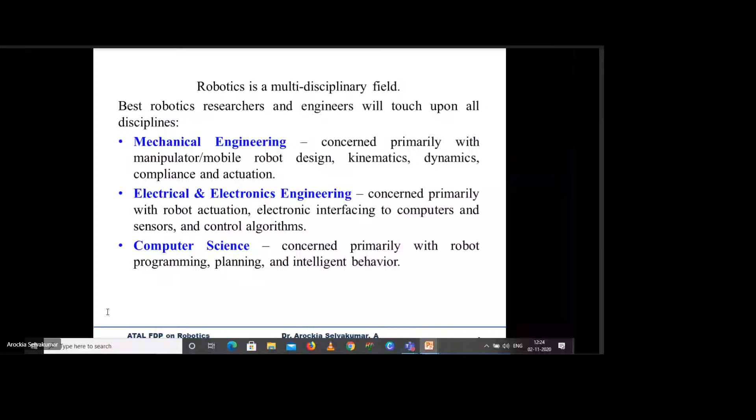If you are interested in robotics but unable to do all these activities, you can have collaborative work. As the earlier professor said, it's a collaborative field.

Next, most people get confused between automation and robotics, so I want to brief about that. Automation means machinery designed to carry out a specific task. But a robot is machinery designed to carry out a variety of tasks. That is the major difference between robotics and automation.

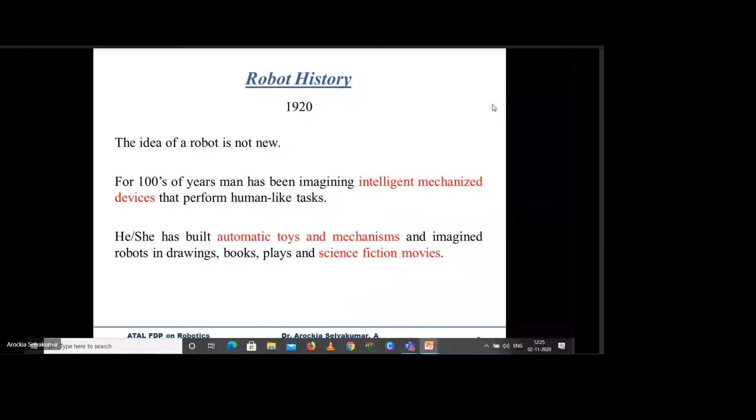Next is robot history. I think you know this well, but let me brief it. It started in 1920, so it's not new. They started making intelligent mechanized devices, and for the past 100 years we've been doing the same thing. In the earlier days, you can see so many automatic toys and mechanisms in movies, and some novels also portrayed this.

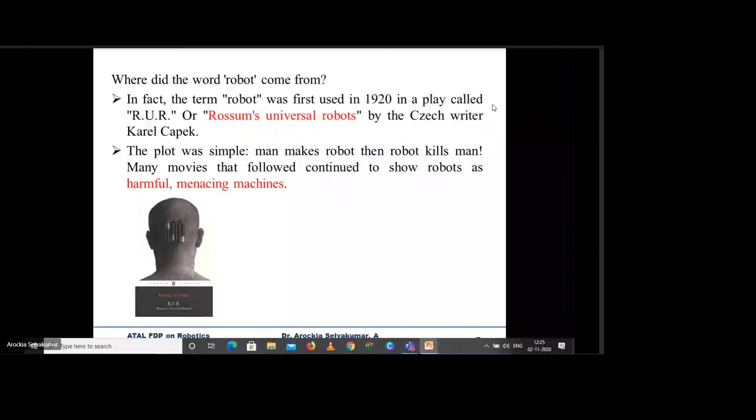The word 'robot' came from a Czech writer, Karel Čapek, in the play called Rossum's Universal Robots. The plot is very simple - if you can find this book, please read it, it's very nice. The man makes a robot, then the robot kills the man. That's really what happened in earlier movies - if you see Terminator 1, the robot kills humans. Later they realized the robot can be used for good purposes, so in Terminator 2 they made one robot a hero and another a villain. The term robot was coined by Karel Čapek in 1920.

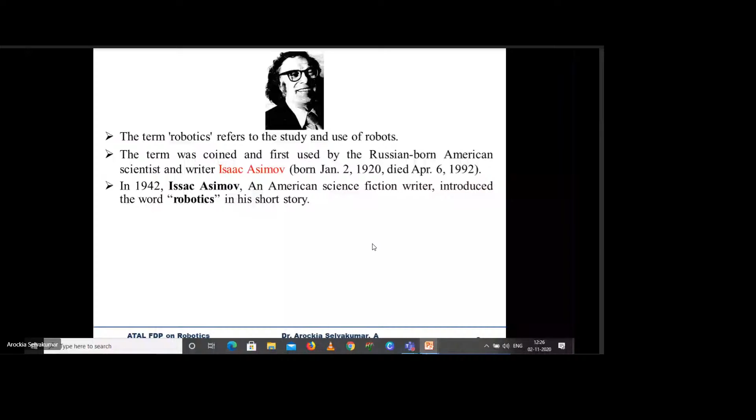Next is the person who made the three principles of robotics, or laws. Because of him, we make robots following these aspects: the robot should not injure a human being - that is the first law. Second, the robot must obey the orders of humans, but it should not conflict with the first law. The third is a robot must protect its own existence.

Till now, I think we've solved the first one - a robot may not injure a human being - we've developed robots following that law around 90%. Law 2, the robot must obey the orders given to it - we've also achieved that up to 90%. The last one, we still have not made robots in that category - that a robot must protect its own existence.

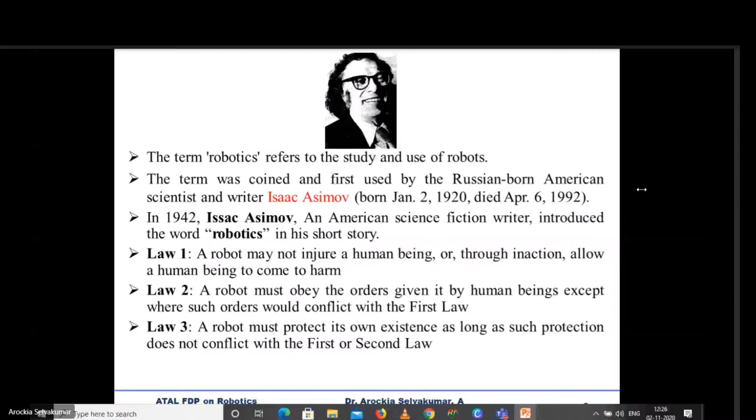So, general definition. Even though it is a very old one from 1920, the definition came in 1979 by the Robot Institute of America. That is, a robot is a reprogrammable, multifunctional manipulator designed to move materials, parts, or specialized devices through variable programmed motions for the performance of a variety of tasks.

If you ask me for a definition, I would say something different because I am basically from robotics, mechatronics, and mechanical design. But if a computer science faculty member is asked what is the definition of a robot, their definition will be different. As per RIA, Robot Institute of America, this is the definition of robot.

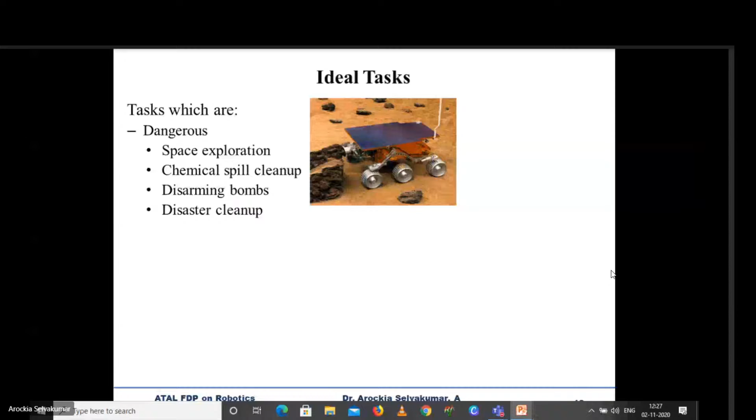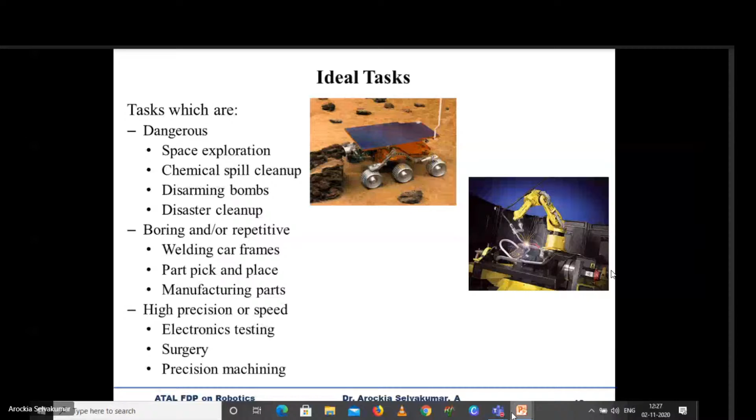So the tasks are at different levels: dangerous, boring, and high precision or speed. Generally they call it the 3D: dangerous, dull, and difficult. Here I am giving some other terms.

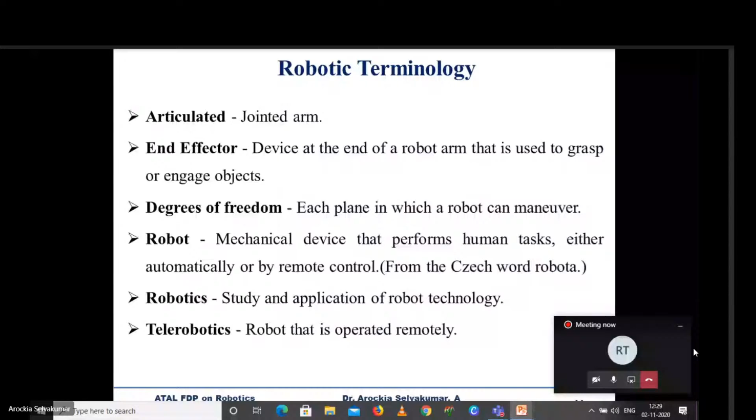Next one, robot anatomy. Any queries till now, professors? If you have any, you can ask me. Otherwise, I will continue. Any specific queries, professors?

Okay. Shall I proceed further? Sir, yes, sir, yes, sir. Yeah, thank you, professor.

So the next one, robot anatomy. It's very important because kinematics is very important. It's concerned with the physical construction of the body, arm, and wrist. Most industrial robots are mounted on a base, which is fastened with the floor. We have come across these in various industries.

The body of the robot is attached to the base, you know. Then the arm assembly is attached to the body. Then the end of the arm is the wrist. Okay, this is the geometrical schematic representation of robot anatomy.

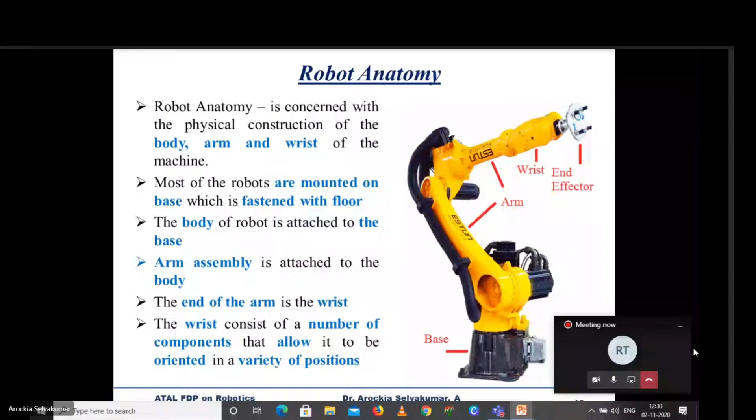One more thing is the wrist consists of a number of components that allow it to be oriented in a variety of positions. So the end of the arm and the wrist are very important, and what the wrist does is important.

As with our human hand, the relative movements between the various components are provided by a series of joints. The body, arm, and wrist are sometimes called the manipulator. The technical name for the robot hand is end effector, and the end effector is not considered as robot anatomy. Please take a note of it.

So whenever we are purchasing any kind of robot, if you come across it, the industry will say that the end effector will not come under robot anatomy. Even the workspace, they will plot and give according to the body and arm of the robot, not the wrist.

One more important thing is the arm and body joints of the manipulator are used to position the end effector. That is very important. And only the wrist is used for orienting the objects.

These are the things which are important from a geometrical point of view: joint, link, and the relative motions achieved by joints. The links are rigid members, similar to our hand.

Most robots have 6 degrees of freedom. The body and arm are used for positioning objects in the work volume, while the wrist assembly is for orientation of objects.

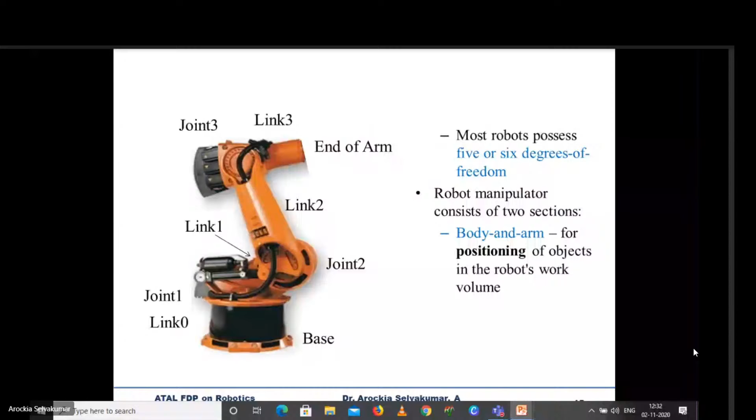Now we will come to kinematics. But before that, I want to explain manipulator joints, which come in different varieties. We will see them one by one so you understand better.

The first type is translation motion, having two joints: linear joint and orthogonal joint. In the first sketch, there is an input link and an output link, and the joint motion is linear. These are called linear joints, with type notation L.

Similarly, in an orthogonal joint, there is an input link and an output link, and the output link always has an offset of 90 degrees to the input link. These are called orthogonal joints. Sometimes the linear joint can also be put as a prismatic joint.

Next are rotary motions, which include rotational joint, twisting joint, and revolving joint. In a rotational joint, the axis of rotation is perpendicular to the axis of the two connecting links.

As an example, all professors have come across the mini drafter, which moves only on a plane. These kinds of joints are called rotational joints.

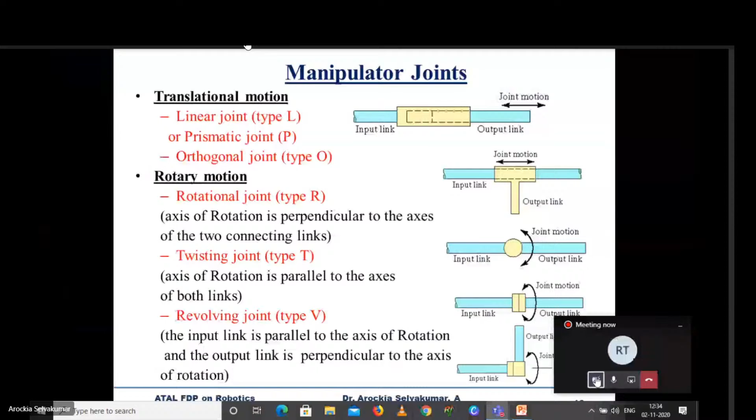Any doubt in this, professors, so that we will be very clear? Any doubt? No doubt, so I can proceed further, I think.

Now the important thing is the joint notation scheme. We use the joint symbols L, O, R, T, V - representing linear joint, orthogonal joint, rotational joint, twisting joint, and revolving joint.

Hello, yes professor, any doubt? Okay fine then. Is it clear? Professors, any doubt? I'm getting some voice. No sir, okay fine then. Ajal, yeah okay fine. Participants are muted or not? Okay fine professor, no problem.

The very important thing I want to discuss in this slide is the body and arm assembly and the wrist assembly - they are always separated by a colon. Whenever buying a robot or reading a research paper, you can understand notation like TLR colon TR, meaning the total robot has 5 degrees of freedom: TLR is 3 degrees of freedom for body and arm, and TR is 2 degrees of freedom for the wrist.

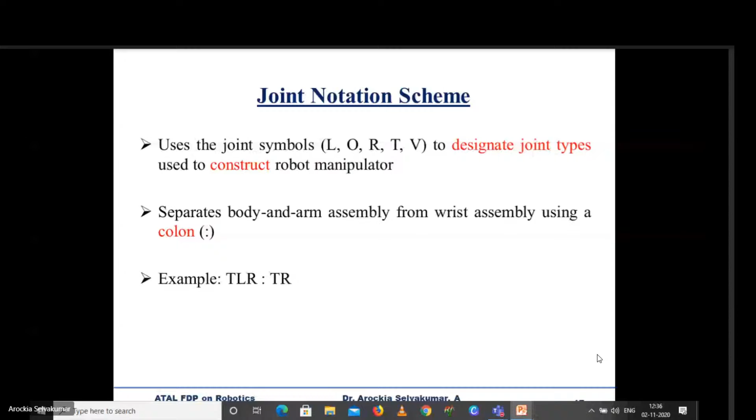Next are examples. You can see TRT colon R - this is how they represent the joint notation scheme, with no need to draw in 3-dimensional form. If you draw these symbols and mark them, we can easily understand how the robot is designated. T is twisting joint, R is rotational joint, T again twisting joint, and R is rotational joint - talking about the first sketch. So it has 3 degrees of freedom in the body and arm, and 1 degree of freedom in the wrist.

Similarly, you have B with totally 5 degrees of freedom: TVR related to body and arm, and TR related to wrist. Similarly, the last one has 3 degrees of freedom: RR rotational in body and arm, and twisting related to wrist.

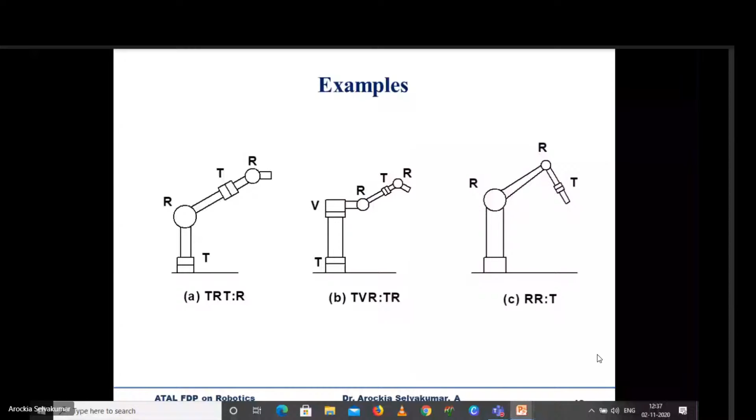Okay. Then robot classifications, it will take time, so I just want to go through fast. Based on arm geometry, you are having different types. Degrees of freedom, you are having different types. Power source, you are having different types. And then type of motion, we are having different types in robots. And then path control also, we are having different types. And the intelligence level also, we are having robots in 2 categories, low technology and high technology.

Okay, then arm geometry, you know that it is having rectangular coordinated. So this is a sample sketch of the rectangular coordinated. If you see the sketch, you will understand that it is having 3 linear movements. If you consider Z, if it is L, then your y-axis and x-axis will be orthogonal joints. So Z will be linear, Y will be orthogonal, and X will be orthogonal. So these kind of robots are called linear orthogonal robot, otherwise LOO joint robot.

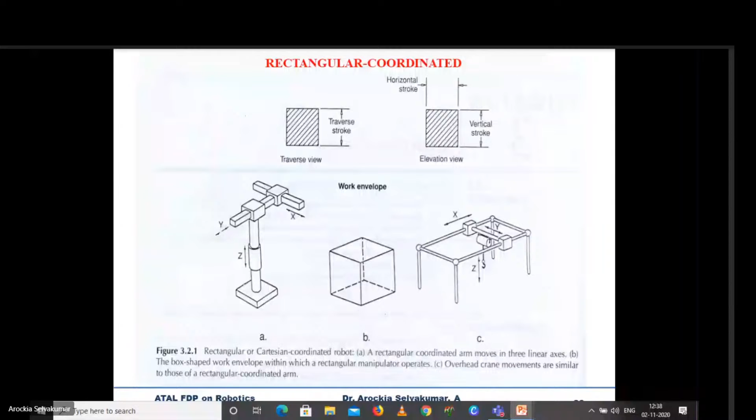Okay, so example, you can see the crane. So this is the way, and the front view and then top view, it's given clearly the work envelope and cuboid structure. This is the example. As I said, LOO, linear joint, orthogonal joint, and orthogonal joint. Why I am saying all these things is when we are doing kinematic analysis, the representation will be easy. That's the thing. And then next one is cylindrical coordinate.

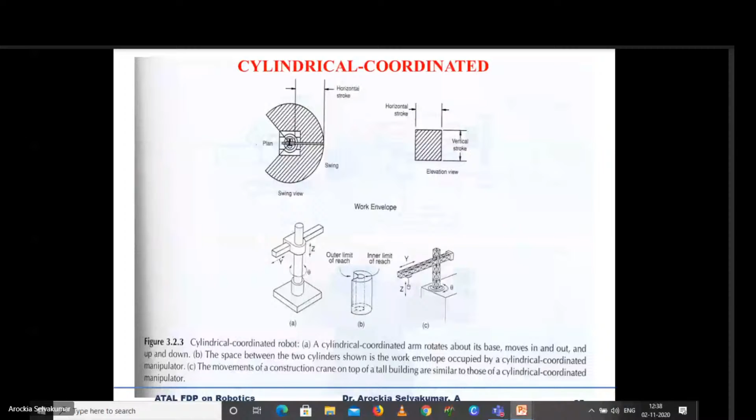So if you see the sketch, you have one rotation, and then you are having 2 joints. One is linear, another one is orthogonal. So one rotation is playing a role. This is the example of cylindrical coordinated robot. It is having the swing, and the elevation is there. So this kind of robots will give a cylindrical workspace. As I said, it is having one twisting, that is T, and then L is linear, and then O is orthogonal. This is the notation of this particular robot.

Okay, and then last one, spherical coordinated. The work envelope will give you a spherical volume. It is having two rotational joints, that is theta and beta, and then you are having one linear joint. This particular thing is known as TRL, that is twisting, rotational, and linear joint. These kind of things you can have in the polar coordinate robot, we will call it as. So these are general different classifications of robot that are used in the industry. Okay.

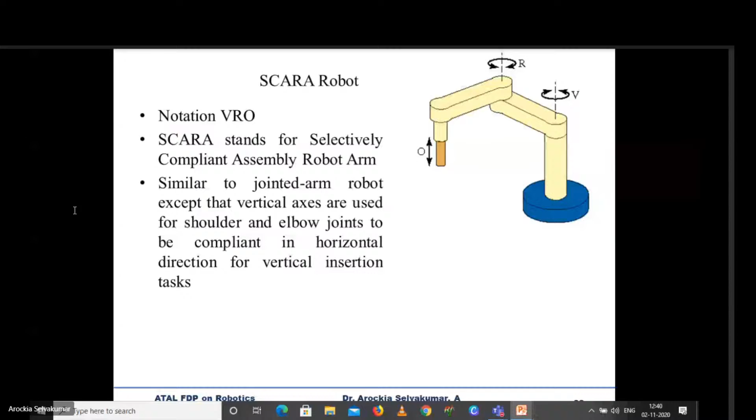The very important one I want to discuss is SCARA robot. This is the robot first used in the industry for peg-in-hole and pick and place applications. We call it selectively compliant assembly robot arm. The notation is VRO. V, you know that it is a revolving joint, R is rotational, and O is orthogonal joint. So if you see the sketch, you can understand now that this particular, 1 minute.

So this particular thing, you can say this is the axis, and then this is the axis of this. As I said, it will look like a fan. It will rotate like this. So that is a revolving joint, and rotational, you know that it's in a plane only. This axis and this axis, it will move like this. That is a rotational joint. And this one, with this link, it is having a 90-degree offset, so it is an orthogonal joint. So this is the way we can define the configuration of a robot. As I said, we use this one in industry, so you can proceed further.

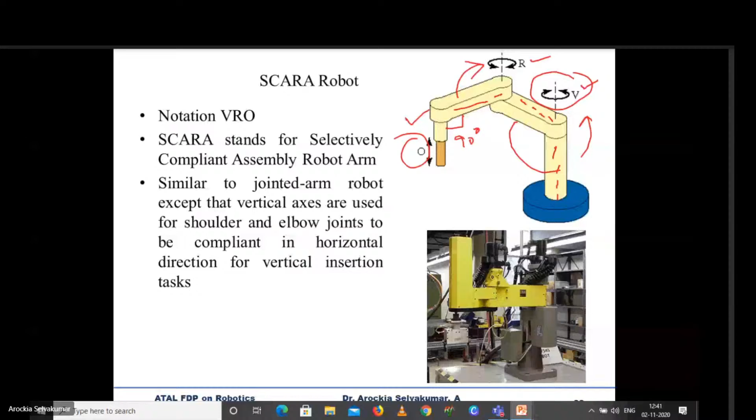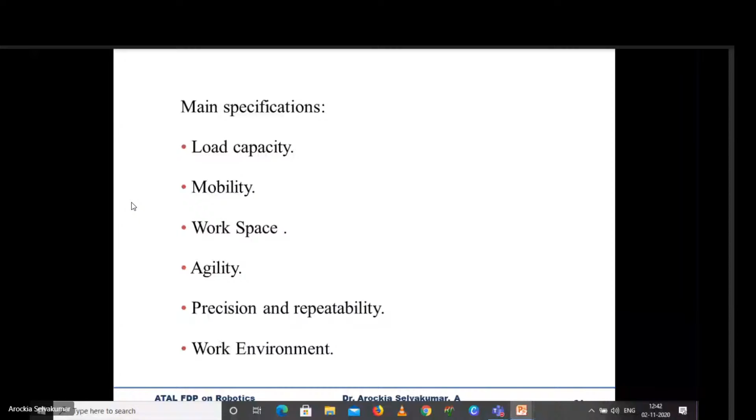The last one is where you want to use it, whether you want to use it for a teaching purpose, or in a food factory, or in an industry. According to that, we have to select the robot. It's a general criteria. So all these things I have already explained. These are general points about how you have to select the robot and what specifications are important.

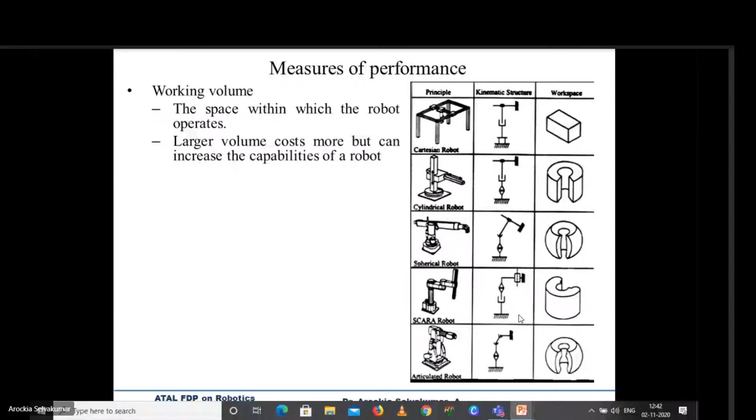Okay, fine then. And the measures of performance, you know that it is based on work volume. Different types of work volumes are there according to the robot structure. And then speed and acceleration is the second one. So how much speed it is acting at, and how much acceleration you can give to that particular robot when it is carrying a load. All those things are important parameters to measure the performance of a robot. And then the final one, resolution, obviously. It's the smallest step the robot can take. That's the thing in resolution.

As professors, all of you must have come across all these definitions if you are teaching robotics. If not, these are the things that are important to measure the performance of a robot: working volume, speed and acceleration, and then resolution. Continuing, that is accuracy and then repeatability, as we discussed. Accuracy is the difference between the actual position of the robot and the programmed position. And repeatability is whether the robot will always return to the same point under the same control conditions. So these two are very important.

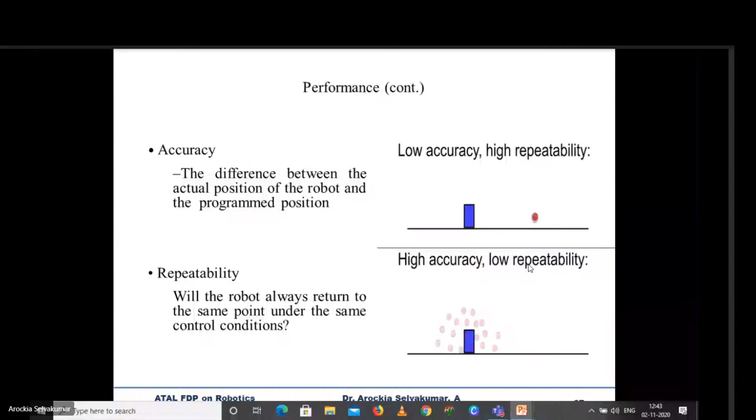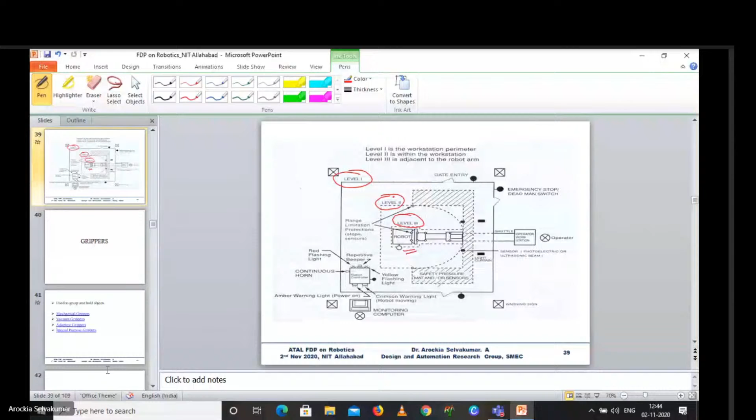So level 1 is the workstation perimeter. Once you are entering the perimeter, that is level 1. Level 2 is within the workstation. And level 3 is adjacent to the robot arm. According to that, different levels of safety are there. So these are general points in robotics design that I want to convey to you.

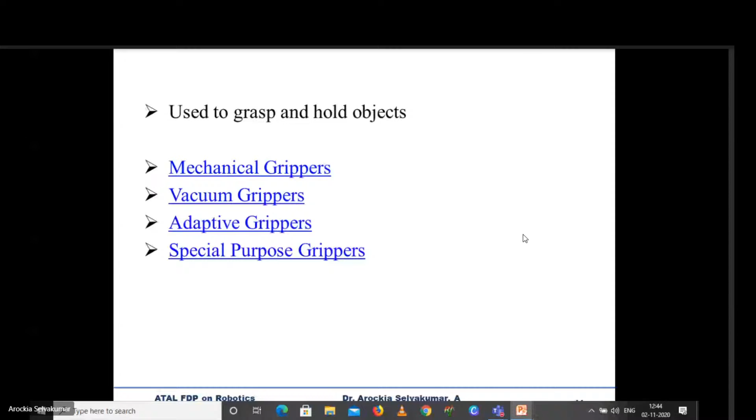Okay, fine. Grippers: we have different grippers, mechanical, vacuum, adaptive grippers and special purpose grippers. Anyway, my topic is the kinematics, so after this brief intro, I will move to the kinematics. And sensors and transducers. We are using many sensors in robotics: accelerometer, gyro, metal detector, gas sensor, from start to end we have n number of sensors used in robotics.

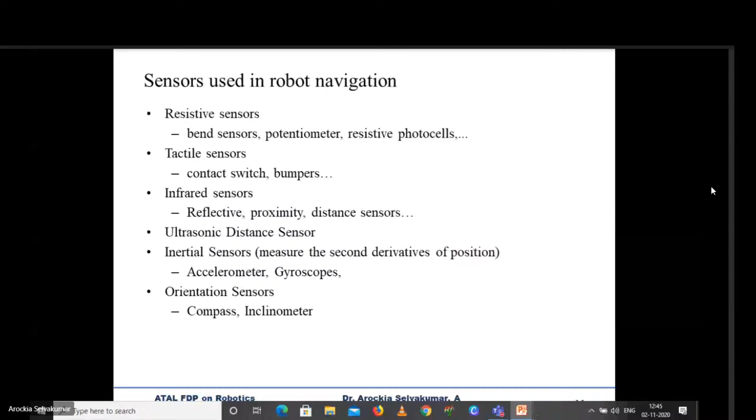So these are simple examples of where we can use a sensor. For example, resistive sensors: bend sensor, potentiometer, resistive photocell, tactile sensors, infrared sensors. For the application, you can ask where I can use this sensor. To measure the bend of a joint, for wall following, and a weight sensor where the load plays a vital role.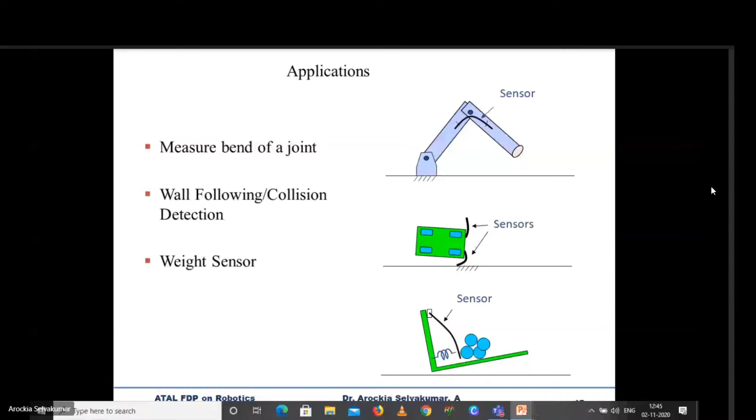With this, any queries so far, so that I can move on to the kinematic analysis?

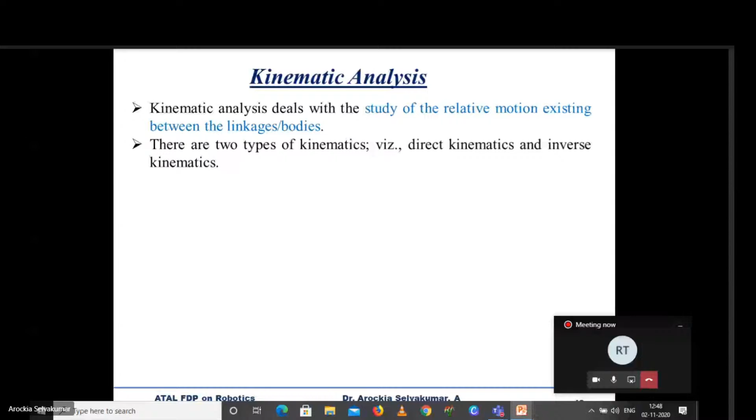And there are two types of kinematics: direct kinematics and inverse kinematics. For better understanding, I will explain with a sketch later. Mapping from joint space to Cartesian space is referred to as direct kinematics or forward kinematics. So now you want to know what is joint space and what is Cartesian space.

So if I'm having a robot, anyway, I can explain here also. If I'm having a small two-link robot, each link will have some angle with respect to the horizontal, for example theta 1 and theta 2. Link 1 will have some angle and link 2 will have some angle. At the same time, I know the endpoint also. If it is a planar manipulator, it will have x and y.

So mapping from joint space, that is theta 1 and theta 2, to Cartesian space, that is x and y. Theta 1 and theta 2 are the joint space. So if I am mapping from joint space to Cartesian space, it's referred to as direct kinematics or forward kinematics. That is the thing I want to convey to you.

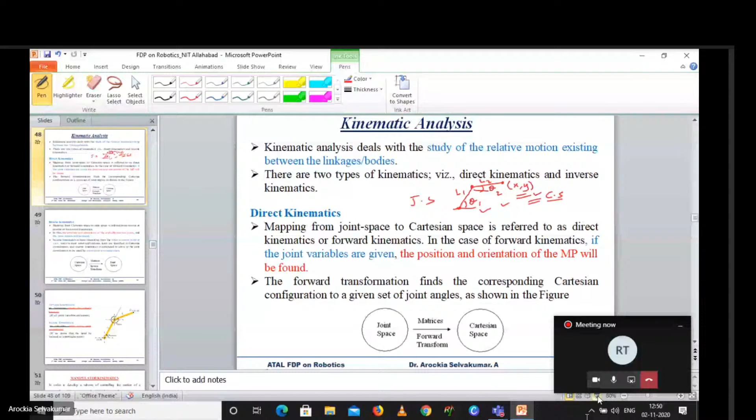If the joint variables are given, theta 1 and theta 2, we can find the end effector position, that is x comma y. Here I put MP, that is not related to the topic, but generally at the end point x and y we can calculate. So the forward transformation finds the corresponding Cartesian configuration to a given set of joint angles. Now I think you can understand much better.

The inverse kinematics is quite opposite. We are mapping from Cartesian space to joint space. It's referred to as inverse, reverse or backward kinematics. In this, the position and orientation of the end effector are given. That means you know x, y, and the link lengths L1 and L2, and the joint angles we have to find. So these are the two kinematics we follow in robotics.

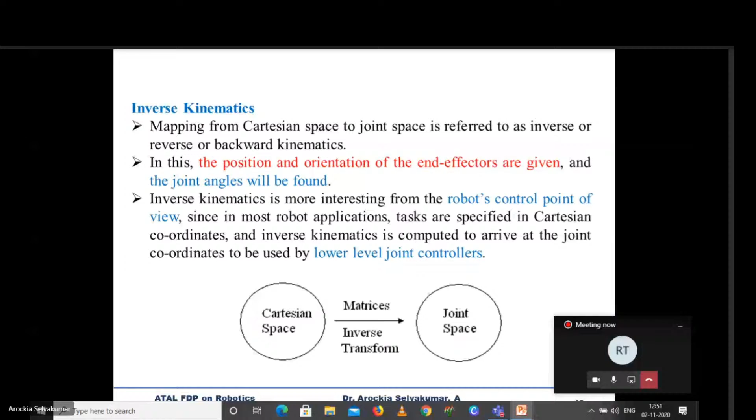The inverse kinematics is more interesting from the robot's control point of view, since in most applications tasks are specified in Cartesian coordinates, and inverse kinematics is computed to arrive at the joint coordinates to be used by lower level joint controllers. So those who are working in this particular area are quite interested in inverse kinematics.

Some example I can explain now. Hope you will listen, and if you have any queries, you can stop me in between. Forward kinematics tells where the robot hand is if all joint variables are known. That means if I know theta 1, the shoulder, and theta 2, the elbow, then you know the end position, that is x and y. And you have to know L1 and L2.

Inverse kinematics is to calculate each joint variable. Here I am very particular about how much theta 1 is and how much theta 2 is. But in forward kinematics I am very particular about what the x value and the y value are. As I said, this is at the origin, for example theta shoulder, and the entire thing you can take as theta elbow.

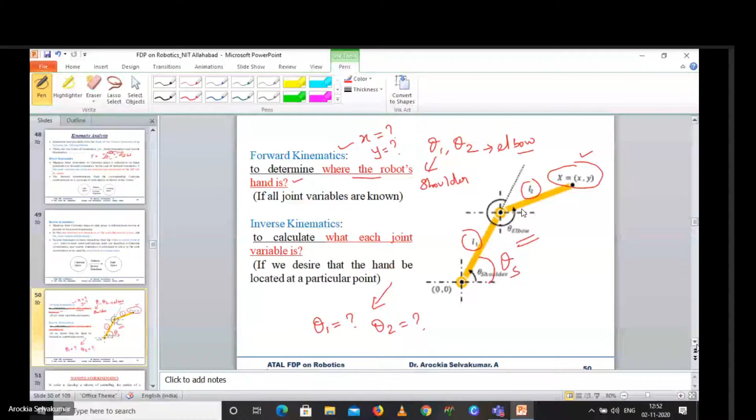So when we are calculating these mathematical relations, I'll go to the next one so that you will understand much better what I am talking about. So how to calculate these things? Why are we doing this? I have explained in this slide.

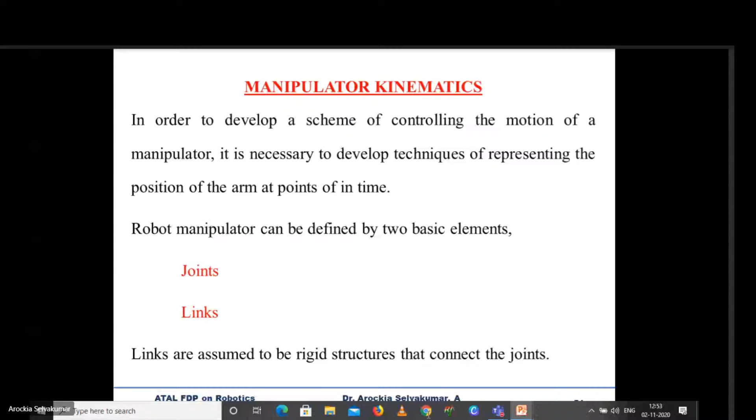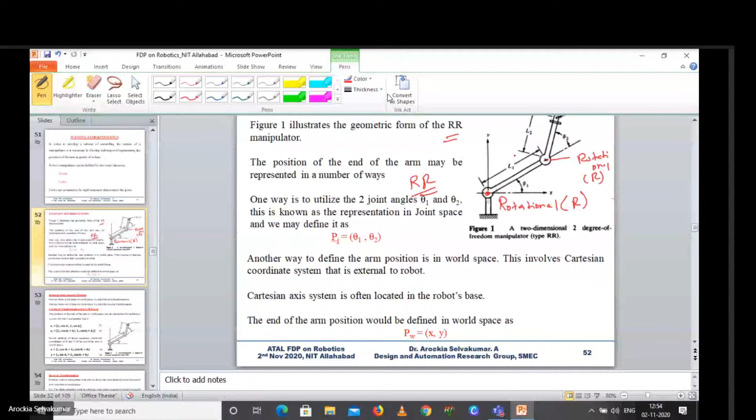The position of the end of the arm may be represented in a number of ways. So here in this sketch, based on theta 1 and theta 2, we can represent the position x and y. Okay, based on the input parameters theta 1 and theta 2, we can represent it in terms of px and py, that is x comma y. Two ways are there, as I said, forward kinematics and inverse kinematics. We will see one by one.

Any queries, professor, so that I can go slow? Any queries till now? No queries? Yes, sir. One query, please unmute yourself. Yes, please unmute. Sir, can you hear me? Yes, I'm getting you. Please, yeah.

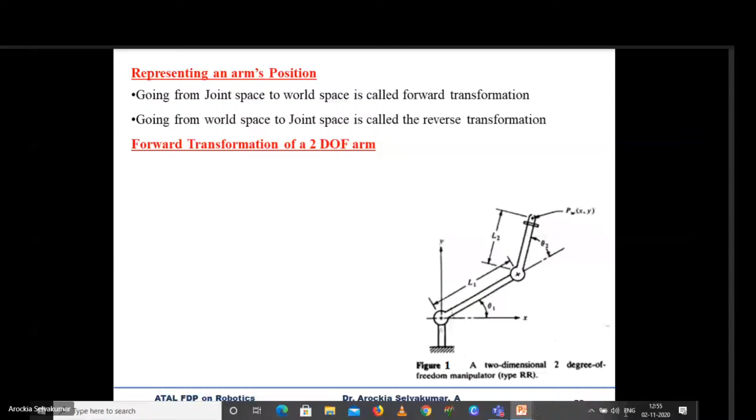Sir, actually, in the forward kinematics, you told that you have to take the angle with the horizontal. Is it a compulsion, sir? No, it's not like that. Very good question. Actually, if you take it that way, then it will give a relative angle. For example, this is theta 2 and this is theta 1.

So when I am calculating for the entire thing, I need a reference point. So from this, if I am calculating, automatically it will come to theta 1 plus theta 2. Are you getting me? Yes, sir. So that is why I said it's better to go with the axes x and y. Okay, sir. Thank you. Anyway, we will solve it one by one so that you will understand much better. Thank you for your question.

So first, I am going with forward transformation. As I said, going from joint space to world space is forward, and going from world space to joint space is reverse transformation. The position of the end of the arm is given. So I will draw here so that those who are interested in kinematics will understand. I am taking the first link alone, and here this is X and this is Y.

So if I want to calculate R1, I want to know the horizontal component. The horizontal is L1 cos theta, taking this as theta, and the vertical is L1 sin theta. I'm talking about this point, point 1. So the first point location, R1, will be L1 cos theta 1 comma L1 sin theta 1. This is the coordinate. Any doubt in R1?

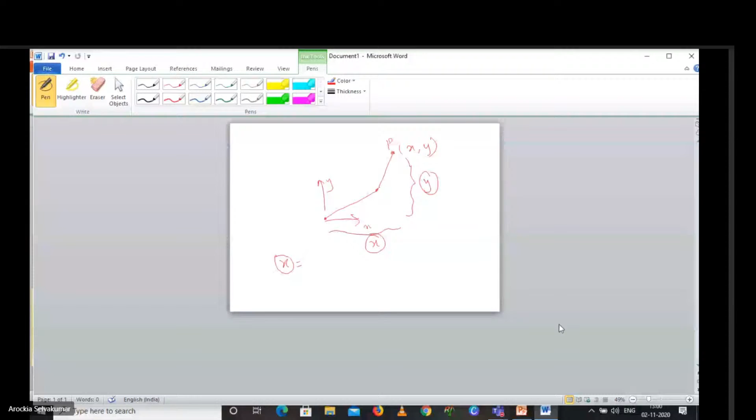So when I am writing, obviously it will come L1 sin theta 1 plus L2, sorry. So when I'm going horizontally, obviously it will come like L1 cos theta 1 plus L2 cos(theta 1 plus theta 2). I will get the coordinate of X. When I'm going with Y, obviously I'll get L1 sin theta 1 plus L2 sin(theta 1 plus theta 2).

So we know that this horizontal distance is L1 cos theta 1, this entire thing. And then this horizontal distance is L2 cos(theta 1 plus theta 2). And this vertical distance is L1 sin theta 1, and this entire thing from here to here, the vertical distance is L1 sin theta 1 plus L2 sin(theta 1 plus theta 2). And from here to here the vertical distance is L2 sin(theta 1 plus theta 2).

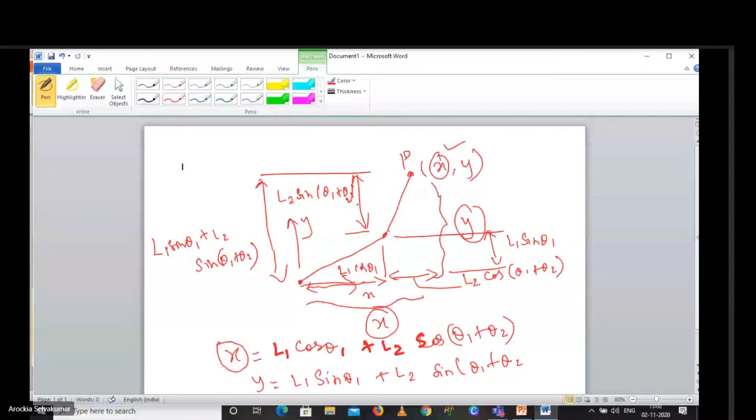Okay, so any doubt, guys? Any doubt, professor? If there is, I can explain. Otherwise, I will move on to the next one. We are just at 10% of my presentation. Can I proceed further? Yes. Yeah. Okay. Yes, fine, sir. Yes, sir. Okay. Thank you.

So the next one, once we have done that: X is L1 cos theta 1 plus L2 cos(theta 1 plus theta 2), and Y, all these things we will get. This is called representing an arm's position in forward transformation of a 2 degree of freedom RR manipulator. If it has some other joints, we have to calculate the position according to that. So the next one is reverse transformation. This is quite interesting actually.

In reverse transformation, instead of X and Y, we have to calculate theta 1 and theta 2. In this particular configuration, there are only two possible configurations for the robot arm to reach the position. For example, this RR manipulator wants to reach this particular point. This is the point and this is the RR manipulator sketch. This is R and this is R.

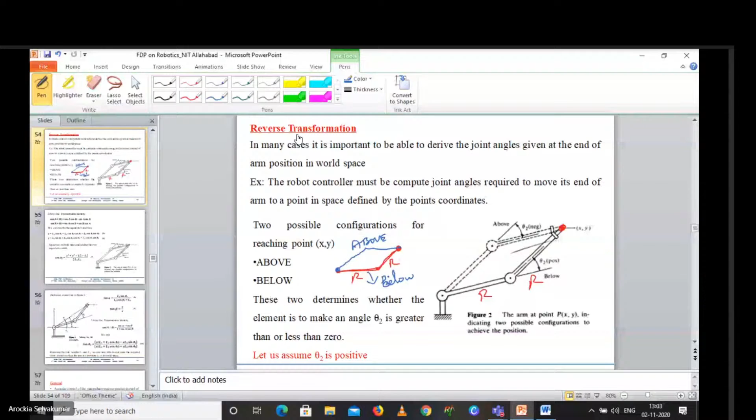So either the manipulator can move like this and then reach this particular point, or the manipulator can move like this and then reach this particular point. There are only two possibilities. One is above, another one is below. Only these two possibilities are there for this RR manipulator to reach the point X comma Y. So that is the definition I have given here.

Okay. So it's up to you to assume theta 2 as positive, or you can assume theta 2 as negative. So when you are calculating reverse transformation, all these conditions you have to check. Okay. That's the thing.

And after this, okay, so now in this case, we are going to use some of the trigonometric identities to solve the problem easily. So you know the 3rd and 4th equations, I want to recollect that. Then only you will understand.

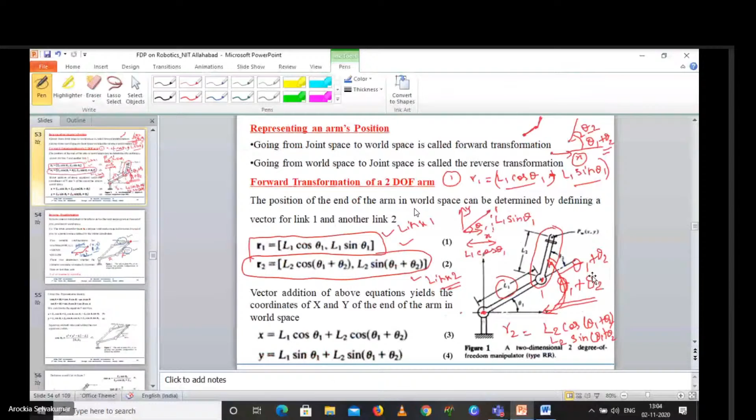I think we have written it before, again I want to recollect that. These things you have to take to calculate the reverse transformation, that is inverse kinematics. This particular equation will be used to calculate the reverse transformation, equations 3 and 4.

That is, X is equal to L1 cos theta 1, L2 cos theta 1 plus theta 2, and Y is L1 sine theta 1 plus L2 sine theta 1 plus theta 2. Because of these things, we have a formula called cos(A+B) and sine(A+B), so we have to use those relations to solve these equations. That only I want to convey.

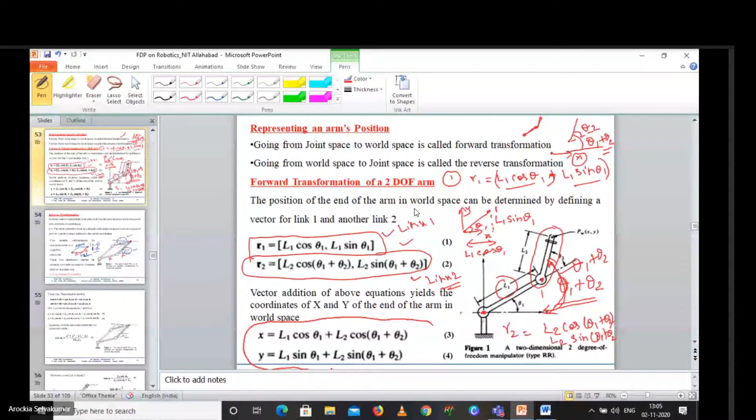Once you take the third and fourth equations, what we are doing is simply rewriting, that is, we are expanding the term. X is equal to L1 cos theta 1, L2 cos theta 1 cos theta 2, and L2 sine theta 1 sine theta 2. If you use this formula, you will get equation 3 in the form of equation 5, and using the same approach, you will get equation 4 in the form of equation 6.

Once you square it, x square and y square, and add these two, you will get cos theta 2 equal to x square plus y square minus L1 square minus L2 square, divided by 2 L1 L2. It's very simple. Sine square theta plus cos square theta becomes 1, and then you can cancel all the other terms, so you get cos theta 2.

So from this you can calculate what is cos theta 2. So this is the first calculation in the inverse kinematics, or reverse kinematics, or backward kinematics. So many terms are there for reverse kinematics.

After this, once we calculated theta 2, we have to calculate theta 1 also. So here what we are doing is, again we are assuming the same triangle, so you will understand much better. So what I am doing is taking the points, this is point 1, this is point 2, and this is point 3, for example, and making a triangle relationship.

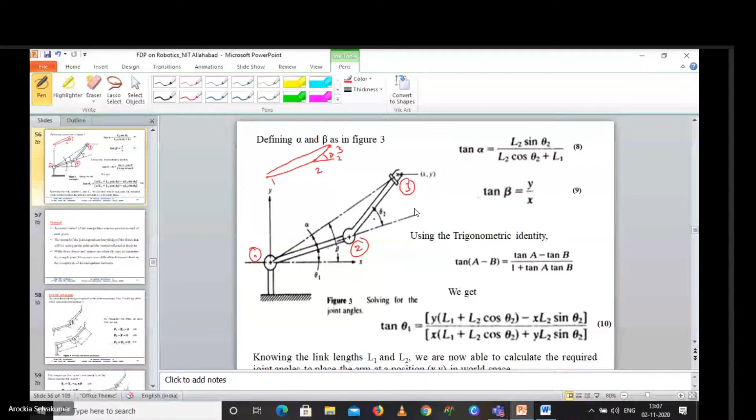This is 1 and this is 2, and I know this angle is theta 2, and this one I am talking about, and I knew what this angle with horizontal is, that is theta 1 here. Then I give the entire angle a denotation as beta, and this one I give as alpha. So all the terms I have given clearly.

So hope you understand this. So for this particular diagram, again we are using the trigonometric relation. Here tan alpha, for example, tan alpha is equal to L2 sine theta 2. So you know where it will come.

I'll draw like this, then you will understand much better. So this is your alpha. This vertical distance is L2 sine theta 2. I have drawn a line here. Now you will understand, I think. This one, this is L2 sine theta 2. I'm not adding theta 1, please try to understand.

And this one, I know very well that it is nothing but L1 plus L2 cos theta 2. So now I am not taking the component with respect to horizontal, I am taking along the line of action only, like this. This is link one, the same line I am taking, and this is the end point, and I am joining this with this, and giving this one as alpha.

So this one I know is L1, and this length I knew is L2 cos theta 2, and this one is L2 sine theta 2. Based on that, what we found out is alpha, and then how to calculate theta 1.

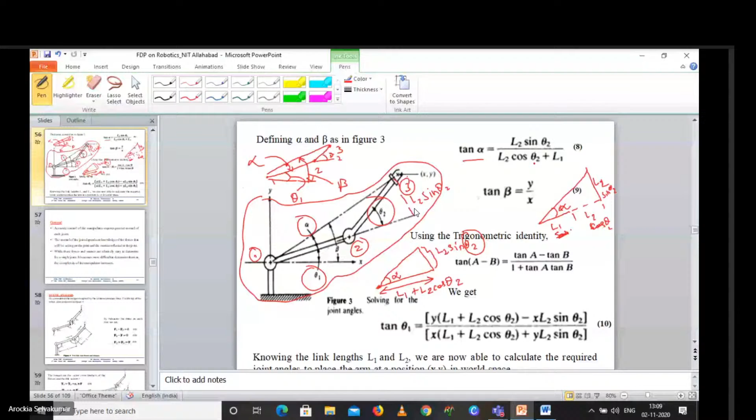So obviously I know this is beta, this is alpha. So if I substitute beta minus alpha, I will get the value of theta 1. In this condition, you see the entire thing is beta, and this one is alpha, this is alpha, this is beta.

So obviously I will get theta 1. With this tan beta I have calculated, you know that. Here I can draw, I think so - sorry if it is quite confusing, extremely sorry, but if you are listening then it will be better. So this is beta, the entire thing is y, this one is x. So when calculating tan beta, it will be y by x. Then I am using tan of a minus b, as I told you, since I want theta 1. So I got theta 1 with this relationship.

If you are having any other queries, please ask. Otherwise, I think it is 1:10, so shall we wind up or shall we continue, sir? You can continue up to 1:30. It's... no, I have some voice, the question I am not getting clearly, that's only. Can I continue? Yes sir, yeah you can continue to 1:30, sir. Okay, okay sir, till 1:30 I'm having.

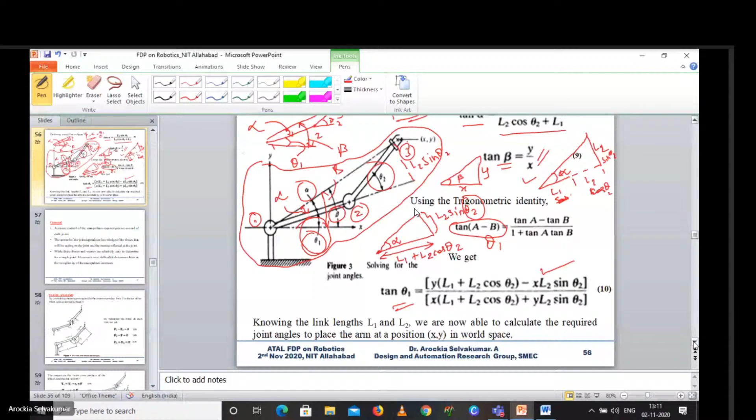Sir, in R2 calculation you have written L2 cos theta 1 plus theta 2, and that is L2 with sin theta. Yeah exactly, that is with respect to link 1, sir. But the angle is taken from the reference point, not taken from link 1. Yeah exactly, you're right, very good question actually. Can I explain here, sir, so that you will understand?

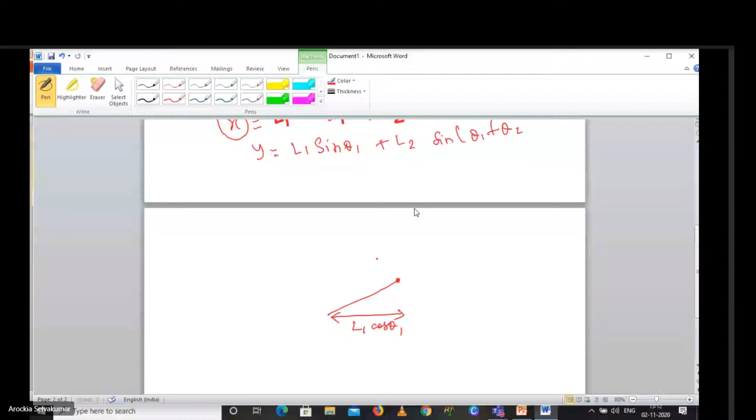So this one will be better in kinematics. Instead of working on the PPT, the thing is, I want to give R1 and R2 only, sir, not with respect to the origin. Taking link one, this one I think so, sir, is L1 cos theta 1, am I right? Yes. And this one I am giving as L1 sin theta 1, am I right sir? Yes sir. So here I am giving that R - this is R, I am giving as L1 cos theta 1, comma, L1 sin theta 1. Any doubts, sir, in this?

No sir. Okay sir, so when I'm coming to the second one only you are having a doubt, am I right? Yes sir. Yeah exactly, that one is also the same thing only, sir. Now I'm taking only the value of this one, as this one is related to theta 2, am I right sir? Yes sir. Now I want to give this R1 - I know this will give the slope value, L2 sin theta 2, am I right sir? This one will give L2 cos theta 2, am I right? Yes sir. But I want the coordinate to be like this in L2 also, so how will I give this one, sir?

So in this condition, when it is coming to the horizontal, when I am plotting, automatically I have to add theta 1 plus theta 2. Yeah, that's only. Here what it came is L2 cos of theta 1 plus theta 2, and here it came L2 sin of theta 1 plus theta 2. Is it clear, sir, now? Okay sir, okay fine sir.

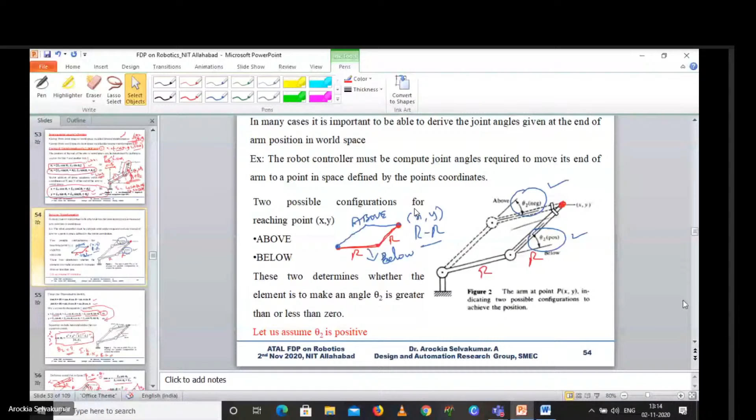Thank you. Any other doubts? If you have, please ask so that I can move to the next one. Excuse me sir, if you are not having any other doubts, excuse me sir. Okay fine, so if you come across other things later, I can move to the next one - very important for control, because we are talking about control, so how kinematics and dynamics are playing a vital role in this. Anyway, in the afternoon session our professor will explain about dynamics, so I am going to concentrate only on kinematics. After this, if you want to make an accurate control of the manipulator, it requires a precise control.

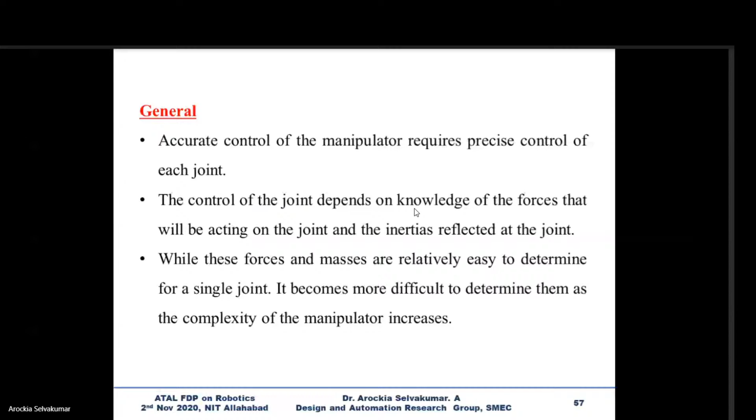So when you want precise control, you have to consider the inertias and how the forces are acting on that particular manipulator. So I want to give a brief overview, maybe the professor will explain in detail.

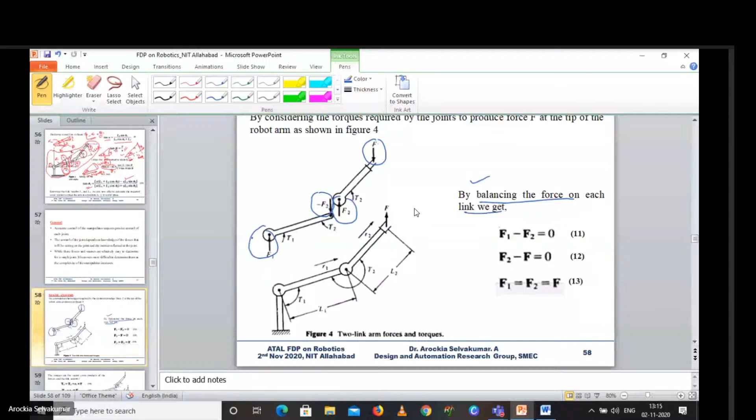I'm not going to deal with this in detail, because after this session our professor is going to take up dynamics. Just want to give a brief about this. Similarly, when you draw the free body diagram, you can represent it like this, with R2, R1, L1 and L2. Finally, you should always remember that F1 is equal to F2 and F2 is equal to F. So this is for two links, how to calculate the force.

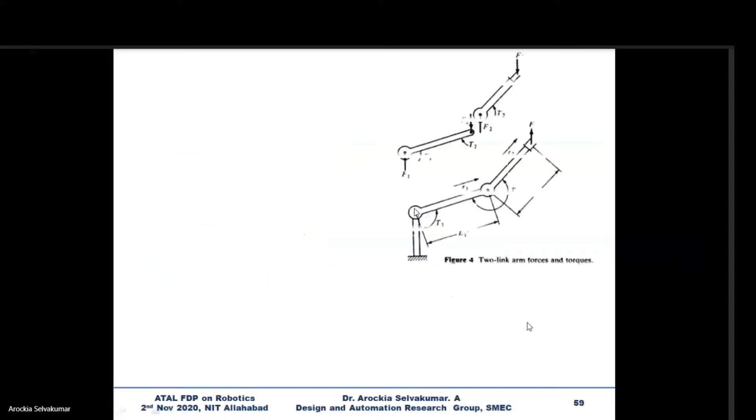Next, I'll move on to torque. So T1 is equal to T2 plus R1 into F, and T2 is equal to R2 into F. These are distance vectors, so distance vector multiplied with force gives you the torque value. Because it's coming in rotation we call it torque; if it's bending, we call it bending moment. That's all, so these are the parameters.

Just to brief about what is happening in the torque calculation. So now you will understand why kinematics is important in designing a manipulator. If you position the manipulator clearly with the parameters, you can easily multiply it with the forces and calculate the torques easily.

These torques are what we give as input to electrical and electronics engineers to find the exact motors we want. Based on that we specify it. Of course the factor of safety comes after this, and you have to select a suitable motor and check it first. Don't just buy a motor rated 10 kgf and run it; first check whether it's actually giving 10 kgf centimeter or not. Those things are important. So this is how kinematics is related to any manipulator or robotics design.

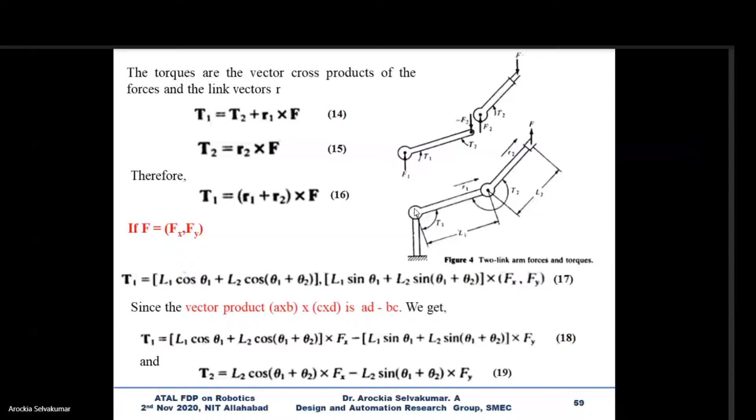That's all, so after this, I think you come... yeah, any doubt? Yes please. Mr. Arun is having some doubts. Mr. Arun, please unmute yourself. Mr. Arun? Yeah, please ask your query, sir. So please continue, sir. Oh okay, fine.

So, based on those equations, you can get the force relations also, Fx and Fy. Now you will understand how the position kinematics helps to calculate the torque and components of forces. You can calculate these things, and give these parameters as input to the robot, and then control its motion. That's the thing, that's only what I wanted to say here.

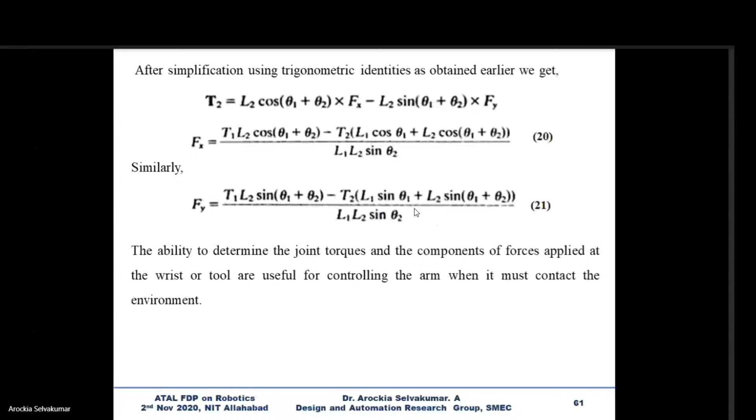In the beginning, this was for 2 arms; we are having up to 6 arms. So now I have a small question for you: to measure the forces and torques in robotics applications, what do we use? Any idea? If anyone knows, you can say, otherwise we will proceed further.

Okay, fine. Okay, fine then, good. It's sensors actually. Okay, that's the thing. Next one is gravity. Anyway, our professors will discuss it, so I want to skip this for the afternoon one. And now this one, because this is general in design, I want to say to you.

The arm can be constructed with as low mass as possible. That is, more of the motor torque will be used to provide forces at the end of the arm. So in a serial manipulator, we face a problem in pick and place applications: after n number of cycles, the position and accuracy have some problem because of the multiple repetitions. That is nothing but fatigue affecting it.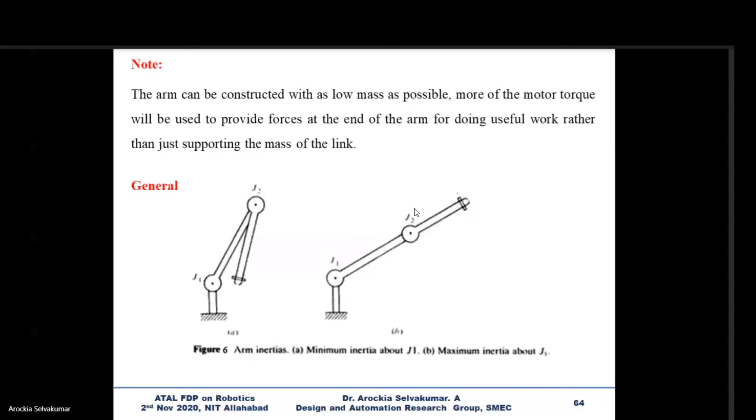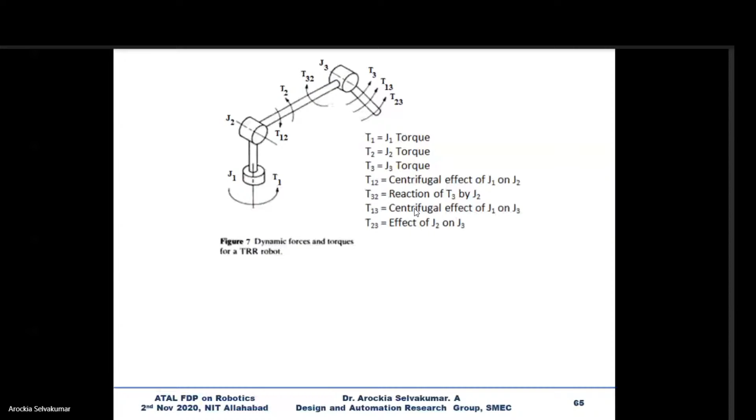So these are the different torques, the dynamic forces and torques of the robot. You have so many torques, and then the centrifugal effect. All those things play a major role. For all these things, the basics are kinematics. That's what I want to say to you. This one is not needed, we will move to the next one. Any queries? I will spend 5 minutes with you. After that, we can start the new one, where we are going to see DH parameters and other things.

Any specific queries, professors? Sir, one question: can you tell more about robot repeatability? What is robot repeatability, and how is it maintained? Okay, fine, sir. Just 2 minutes I will spend, after that I can go. So repeatability, same definition only, sir.

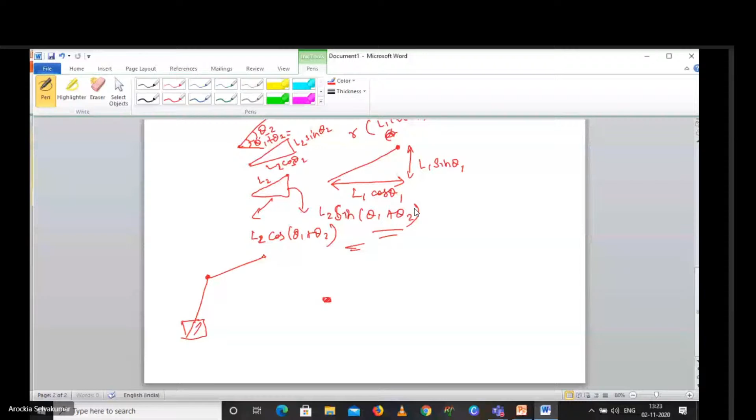Suppose you have, for example, a robot fixed with 3 links. Consider it like this: 3 links, and then you have an end effector here. It has to come and take this particular object and place it. It has to come and place the object here, but your robot keeps on coming and placing your object here. Are you getting it, sir?

Yes, sir, I am listening. Okay, here only it is coming and placing always. So how many times the robot comes and places the object at the same point, that is called repeatability, sir. It is not related to your exact location. Are we clear, sir? Yes, sir. So you can achieve this with sensors, proper kinematics, and all this control. How many times it comes to the same position.

Tell me, sir, there is a doubt. Yes, professor. What is the difference between accuracy, precision, and repeatability? Yeah, that's what I said. Repeatability is related to how many times. Okay, are you clear with repeatability, professor? Yes, sir. Thank you, sir.

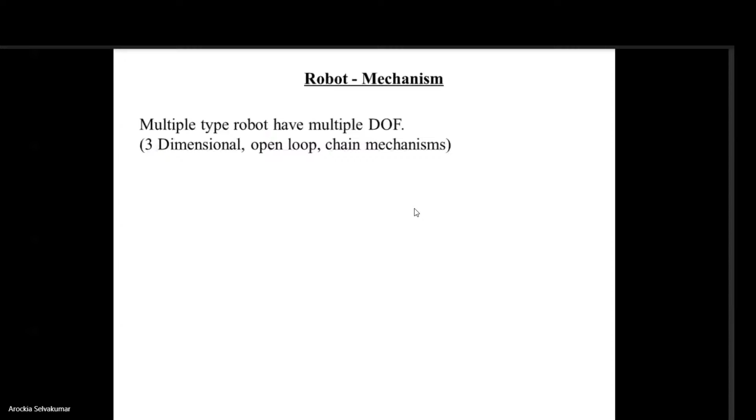Can you tell me which torque you are talking about, the motor torque or the torque applied by the force of the body? Very good. First we are talking about the design of the system, so we did not consider any major forces. For example, you can consider the self weight. First you design for the self weight of these links, then you get the value of torque and force. After that, you apply the actual force, how much you want to lift, for example a pick and place.

Maybe here you will have an end effector, in this particular area, which is going to lift a load of 2 kg. Now you apply a force for different configurations. Maybe the force will be vertical, or horizontal. So which one is the worst condition, Professor? Any idea? The fully extended condition will be the worst condition. Yes. So in the fully extended condition, you apply the force of 2 kg, and then calculate the force and torque.

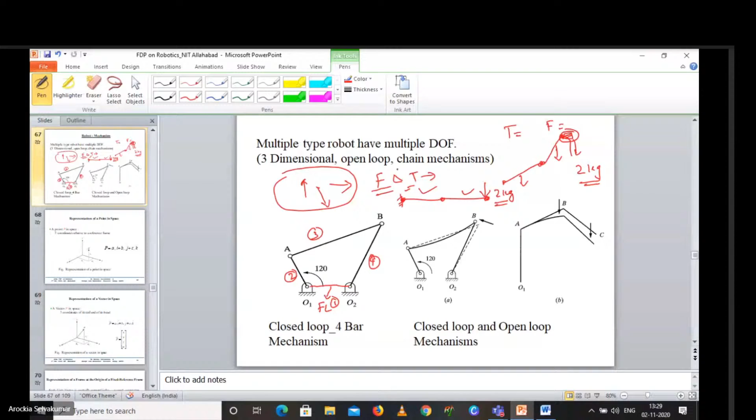After that, please don't go with the design directly. Please multiply it with a factor of safety of minimum 4. Based on my research experience I am saying this; if other professors suggest otherwise, please follow them. On my design I went for a factor of safety of 4, and I bought a motor of 10 kg-centimeter, but my robot did not move even after that. Why? There are problems like friction, losses in the joints, and design constraints. So apart from motor selection, we have to consider all these aspects.

So after applying the factor of safety, 4 times the actual torque or force, your mechanism will definitely work if it has proper design for the friction at the joints and the design constraints. All these things you have to check once again. That's what I have suggested. Then we have to put it into the expression. Exactly, you should multiply. That is very important.

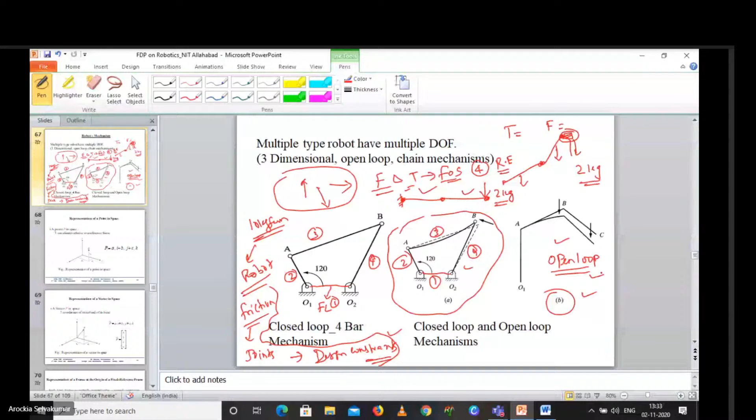Okay, that's the thing. So if you see our industrial robots or wherever you see a serial manipulator, the base will be very bulky. After that, the shoulder, elbow, and up to the wrist, it will be similar to our hand. Our shoulder is big, the elbow is smaller, and the wrist is comparatively smaller. So the arrangement is the same in a serial mechanism.

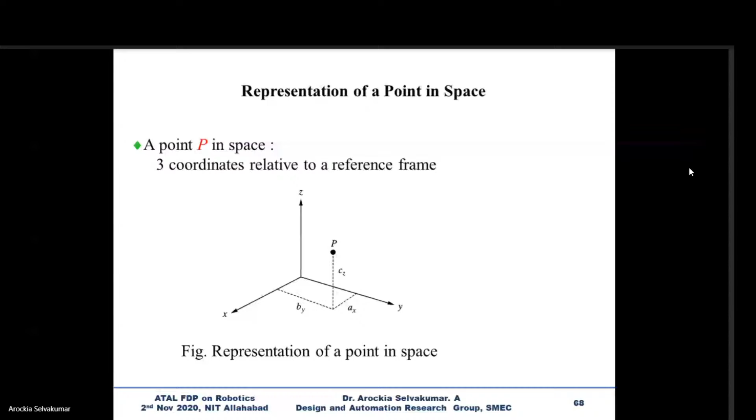So the point P can be represented as AX, BY, and CZ, that is, AX I vector, BY J vector, and CZ K vector. Just I want to recollect. After that we can move on. So next, if it is in space as I mentioned, you can give with respect to the x-axis, y-axis, and z-axis how much distance the point P is placed. With respect to the x-axis it is given in BY, with respect to the y-axis it's given in AX, and with respect to the z-axis it's given in CZ. So you can write it like this: AXI, BYJ, and CZK.

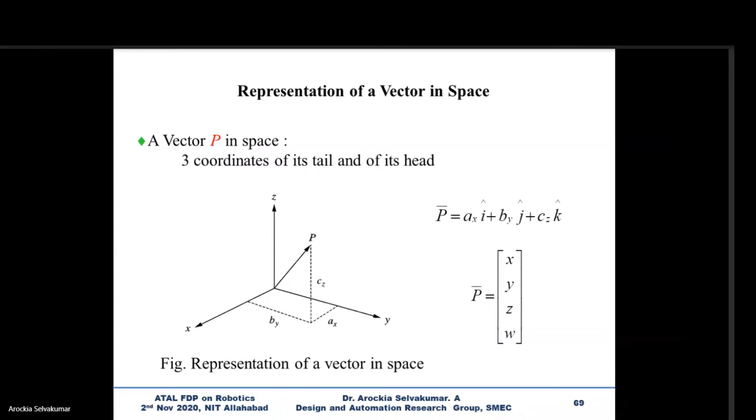So after this, you can represent it in a simple column matrix like X, Y, Z, and W. W, you know, is related to scaling. If you put 1, all the parameters will be unit. If you put 2, whether it is increment or decrement, it's up to you to put the values in W.

Now we are moving to the next one. So how to represent a frame at the origin of a fixed reference frame. Anyway, I will relate all these mathematical relationships to robotics later or in the afternoon session. So generally, if you have a frame at the origin and a fixed reference frame, we take two different notations: XYZ, related to the fixed frame, and NAO, related to your moving reference.

For example, you can have the fixed reference as your shoulder endpoint in your hand, and then NAO is your wrist endpoint. Like that you can have it. So you can write these as normal, orientation, and approach vectors. NX, OX, AX are related to the X direction, NY, OY, AY are related to the Y direction, and NZ, OZ, AZ are related to the Z direction.

So this is the way we have to represent a frame at the origin of the reference frame. Somebody will ask whether we have to put it like this only or we can align with the reference frame. Yes, you can align with the reference frame. That is not a problem. But I want to differentiate what is the fixed frame and what is the representation of a new frame. That's all I have given here.

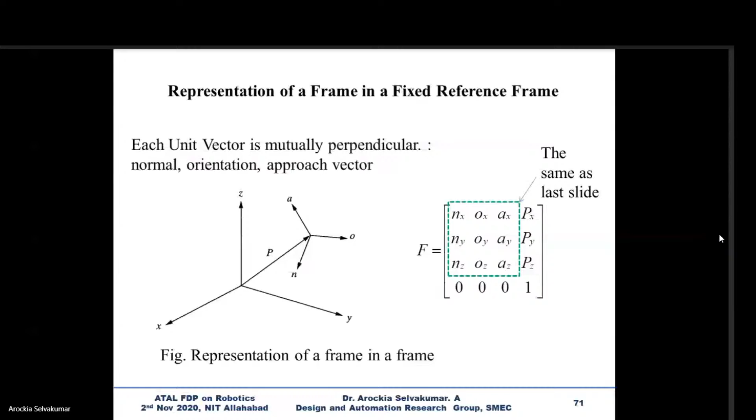Yes, please. So what is the need of changing the frame of reference? If we have a simple frame of reference, then what is the need of changing it? Very good question, sir. Here, I'm having a robot, for example. Consider it is in the X, Y, and Z axis. My origin is here, all 0, 0, 0. But when the robot has to rotate, this point is something like 5, 4, 3. So whether I need X, Y, and Z, yes or no?

Yes, sir. So in this case, my origin is X, Y, Z, for example. But for this moving point, the axis will be different. It may not be the same. As we said, it is N, O, and A. It won't be the exact match; it will have its own orientation. Are you getting it, sir?

Yes, sir. So I may not place it at the same origin. It is not necessary, because it may bend like this. At that time the origin will be X, and the moving frame axis will be different. Maybe this one will be A, this one N. It depends on what we are interested in. I will explain later. Hope you understand why I'm not taking the same XYZ axis. Got it? Yes, sir. Thank you.

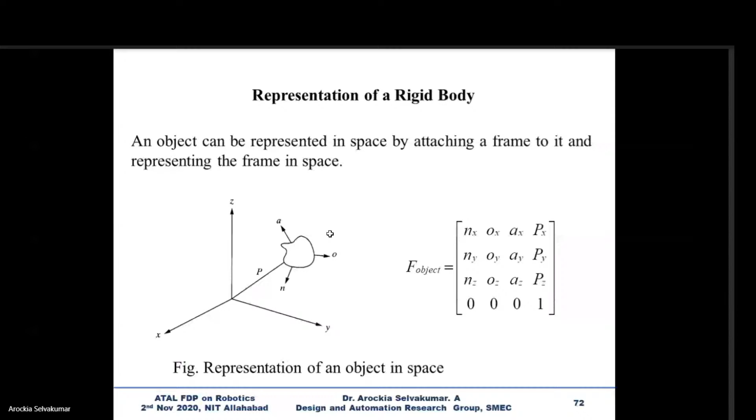So next is how to represent a rigid body. The same way. If it is in space, you can represent it as NX, NY, NZ, OX, OY, OZ, AX, AY, AZ, and PX, PY, PZ. As I said, the homogeneous transformation matrix we will see in the next class. The transformation matrix must always be square, because it is much easier to calculate the inverse of a square matrix and to multiply two matrices, and the dimensions should match. Then we can calculate easily.

And one more thing for the professor who asked why we are not keeping the same reference: just think of your shoulder and your wrist. Your shoulder joint will have its own XYZ, and your wrist will have its own different reference axis.

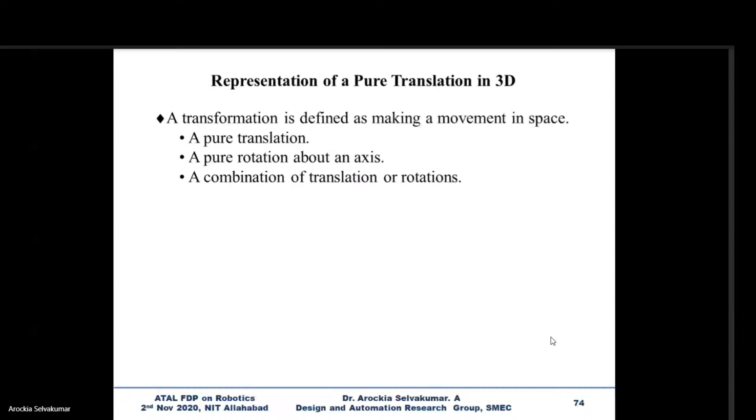I'm happy about that. So now we are moving to the pure translation in 3D. And when you are considering pure translation, what are the things you have to consider? I want to just give it, but anyway, you will understand also. Okay, that's the thing. Actually, with this, it will directly give the answer, even when I am explaining that.

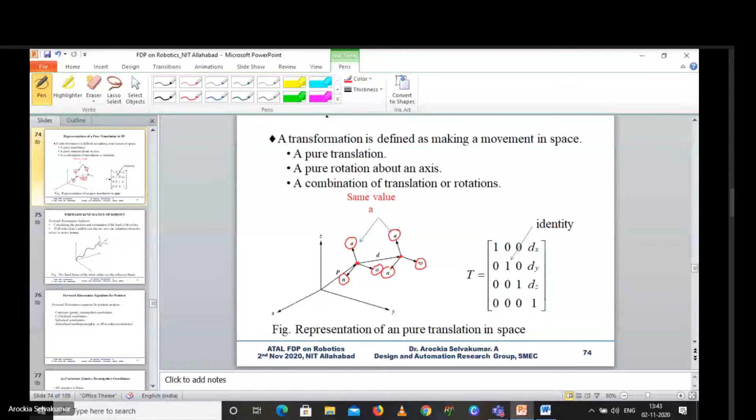So your equation will become: the rotation matrix will become an identity matrix, and the translation value, you can see that it will be dx, dy, and dz. Okay, for better understanding, this one I can explain. That is, it is moving from here to here. There is no change in the parameter of the reference frame. Okay, so it is only translating.

So when it is translating from this point to this point, obviously your rotation matrix will become identity matrix. This is rotation matrix. And how to give this d value? So this is in space, so obviously it will have dx, dy, and dz. So these are dx, dy, and dz. That's all. So when you are considering purely translation, then this will be your homogeneous transformation matrix. Hope you understood clearly. So I will move to the next slide.

So the next one is by taking some numerical value. Yes, exactly. So for example, this particular point is 5, 6, 7. So suppose dx doesn't have any value. It will be 0, for example.

So your slides are not visible. Is it visible, sir, or not? No. Yes, sir. Now visible. Oh, okay, sir.

So for example, dx doesn't have any distance. Suppose the second point value is 5, 9, 8, for example. So your dx value will be 0, dy value will be 3, and dz value will be 1. Am I correct, sir? Yes, sir. Okay, so fine. This is 3, and dz will be 1. So this is the way we have to calculate.

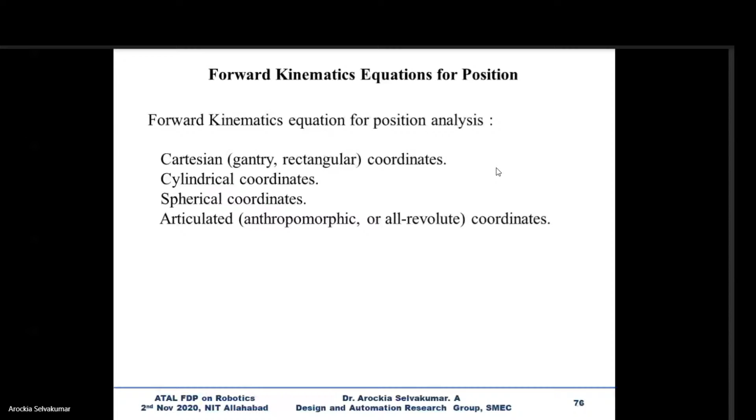Excuse me, sir. Yes, professor. My mic was not working. I have a doubt in inverse kinematics. We did the inverse for the RR robot, like we derived the inverse. Yeah. 1 minute, professor. I will come to that particular slide so that you can ask.